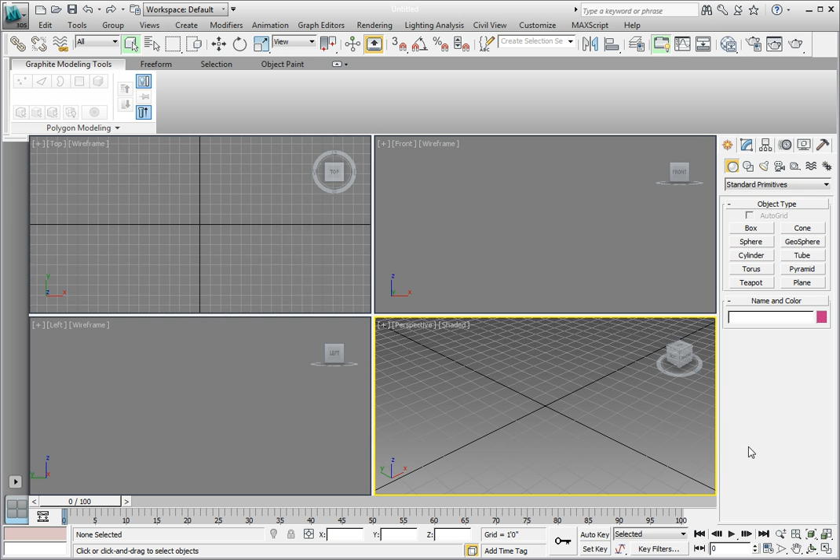Let's begin learning about object space modifiers by opening a new scene. This is one we haven't used yet. Click on the Application button. In the drop-down menu, select Open. Navigate to the Chapter 3 Datasets directory and open the file Chapter 3 Facade Bevel Profile 01.max. Remember, you can double-click on it to open it or select it and click the Open button.

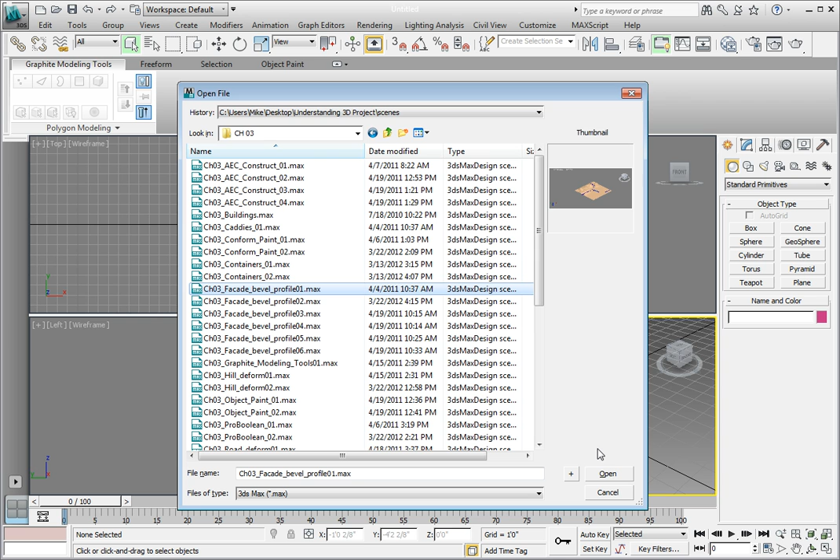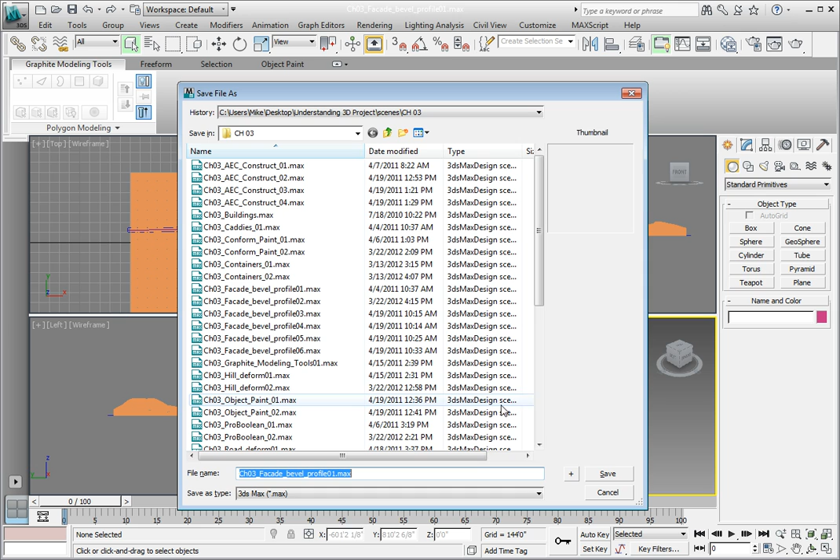The file that opens is our hilly scene with a landscape and our street. We have in this scene two additional pieces of 2D geometry that we'll be using for the exercise in this lesson. The first thing that we want to do is save with an incremental file name. Again, we go to the Application button. In the drop-down menu, select Save As. Then click the Increment button. This will save the file with a new file name of Chapter 3 Facade Bevel Profile 02. If it asks you to overwrite a file, go ahead and click Yes to overwrite the file.

Now we are working with a new file just in case we mess something up and need to load this file again. What we're going to do in this scene is put a roof on a building called Building 5. Let's get Building 5 selected and go find it. We need to select the object. The easiest way to do that is to click the Select by Name option from the main toolbar. Or you can press the H key on the keyboard.

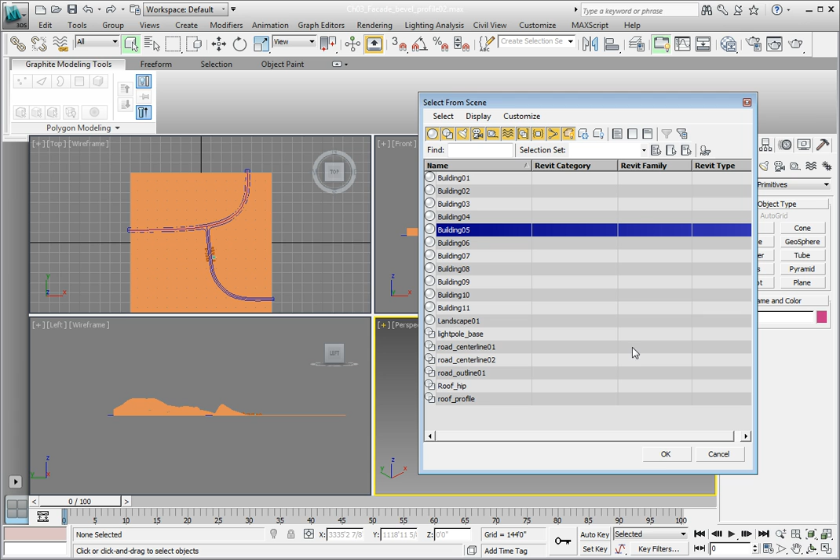This opens up the Select from Scene dialog and gives us a list of all the objects in our scene. In the Select from Scene dialog, double-click on Building 5 to select it, or click once on Building 5, then click OK in the bottom right of the dialog. That selects Building 5 in our scene. Now we're going to zoom in on just that building in all the viewports. We used the Isolate selection before, and that hid everything except the object we were working on and zoomed in on it. Here, we just want to zoom in on it without hiding any of the other objects.

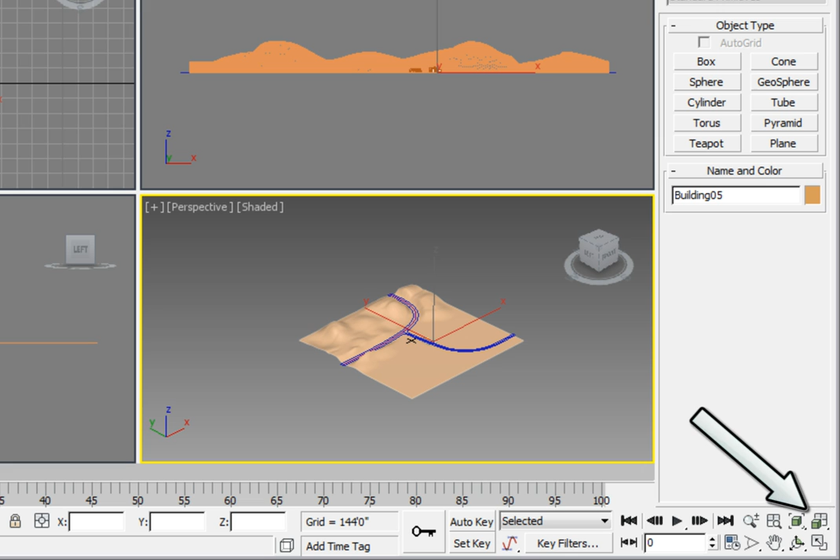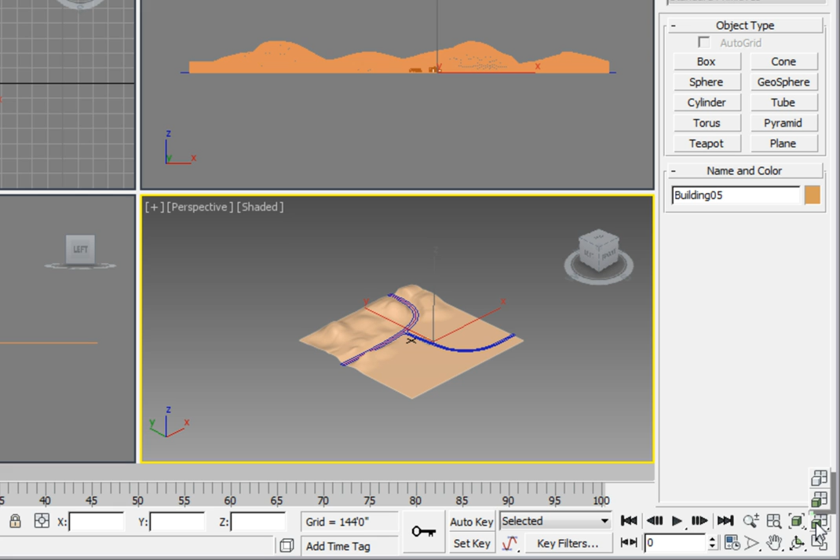In the lower right corner of the display, you'll see the Navigate buttons. We want to focus on the Zoom Extents All button. The default option is not what we want. That will zoom the extents to all of the objects in the scene. We want to zoom to the extents of just the selected object. To do this, click and hold the Zoom Extents All button. A flyout will appear. Select the Zoom Extents All Selected option. This will fill all the viewports with only the selected object. It doesn't hide anything or go into any kind of isolation mode, it just zooms to the selected object.

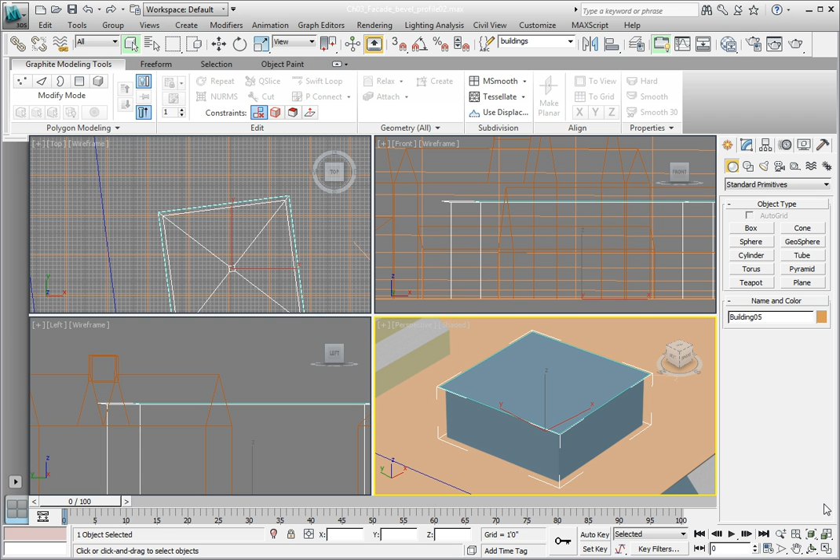You'll notice a new rectangle surrounding the roof of Building 5. Select the 2D shape by clicking on it, then switch over to the Modify panel in the Command panel. Make sure you have selected the object called Roof_Hip. If you don't have it selected, click again, or you can select it from the Select by Name option in the main toolbar. It should be fairly easy to select in the viewport. This is a 2D primitive rectangle. It is a parametric object with parameters for length, width, and corner radius.

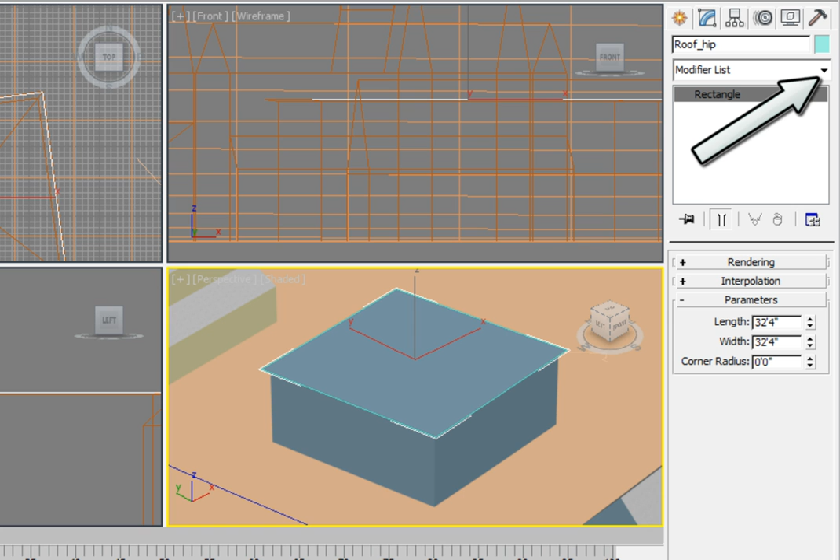We want to apply an object space modifier to this called Bevel Profile. To apply this, we click the down arrow to the right of the modifier list. In the Object Space Modifier area of the modifiers list, we want to look for the Bevel Profile modifier. Click Bevel Profile. This applies the modifier above the rectangle in the modifier stack. It's no longer a 2D rectangle now, it's a 3D object. In this case, it just looks like a flat plane. This modifier has its own parameters, one of them being the Bevel Profile. Click the Pick Profile button.

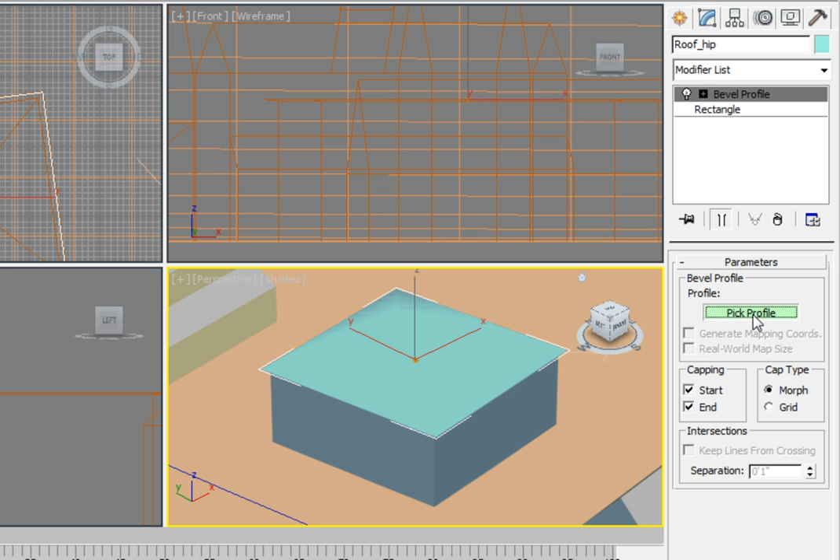Now, we need to select another 2D shape. In this scene, it's called Roof Profile. If you're not sure where it is, we can easily get to it by pressing H on the keyboard. This brings up the Pick Object dialog. This dialog only shows us valid 2D shapes. You'll see one called Roof Profile. Click to select it, then click the Pick button in the lower right-hand side. We now have something that looks sort of like a mansard roof. It's not exactly a hip roof. You'll notice it has fascia, soffit, trim, and roof surfaces.

So one modifier is acting on the rectangle and uses a profile shape. And here it is. We can zoom in on it in the top viewport. You can see that it's just a simple 2D shape, and the modifier has used this shape, applied it to the rectangle, and created 3D geometry. This is an object space modifier for working on two pieces of two-dimensional geometry to create a new 3D object. Press Ctrl S to save the file.